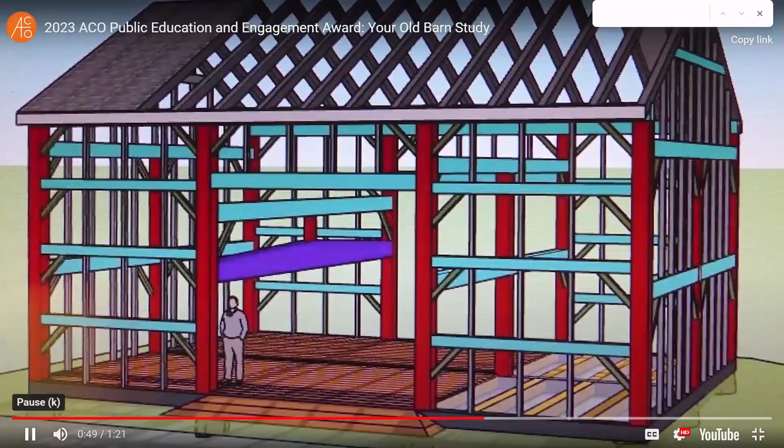Your Old Barn Study is the 2023 recipient of the ACO Public Education and Engagement Award. Founded in 2019, the non-profit Ontario Barn Preservation (OBP) is the only provincial organisation committed solely to the leadership of saving old barns. Partnering with the University of Guelph's History Department, over two years OBP directors and six experiential course students created the Your Old Barn Study software, designed to capture valuable data on the construction and significant features of old barns, as well as wonderful old barn stories. The project's innovative idea is to train a small army of owners to document their own barns using simple educational tools, smartphones, and computers, to collect and send searchable information to a central database. Ontario Barn Preservation believes Your Old Barn Study may result in one of its most significant methods of saving old barns. Although only dozens have thus far been studied, the ball is now rolling.

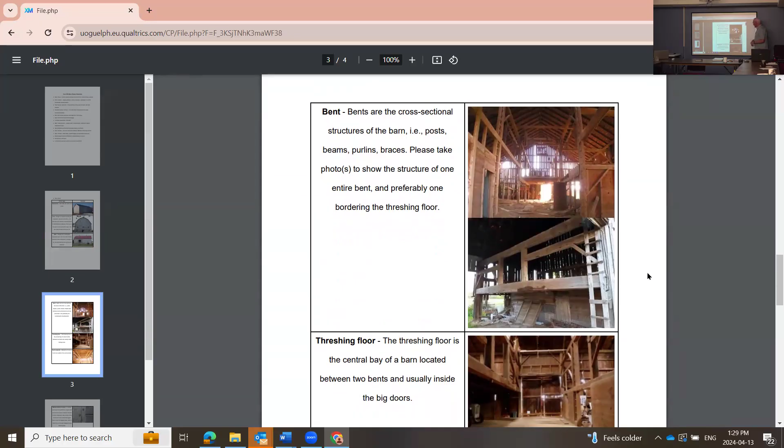We'll talk to you about why you should do those and how to do them. We're going to be asking you to take some pictures of the bents, which are the framing members that hold up the barn. We're going to ask for a picture of the threshing floor, which is the big floor area usually at the front of the big barn doors. And we're going to ask you to take a picture of the roof.

You may say, well, that's a strange thing to take - the roof, why would I do that? Well, it tells you an awful lot of information. To the trained eye, you can tell an awful lot.

When I get people who call me about swing beam barns, they'll say, I have a beautiful swing beam barn. I say, here's 3 pictures I'd like you to take for me. And I can tell them just about everything I need to know about their barn without even going out of my house, and I can see things. I had a fellow last week who called me from Ohio to buy my book.

And he says, I have a swing beam barn. I said, really? Can you take a couple pictures? Anyway, he took a couple pictures, and there were some things in that barn that I see in barns here in Ontario he'd never seen before in his own barn - never, including his father, who's older than me. You can tell things about it - I said that ages the barn, that helps tell how old that barn is. So you can learn an awful lot from these.

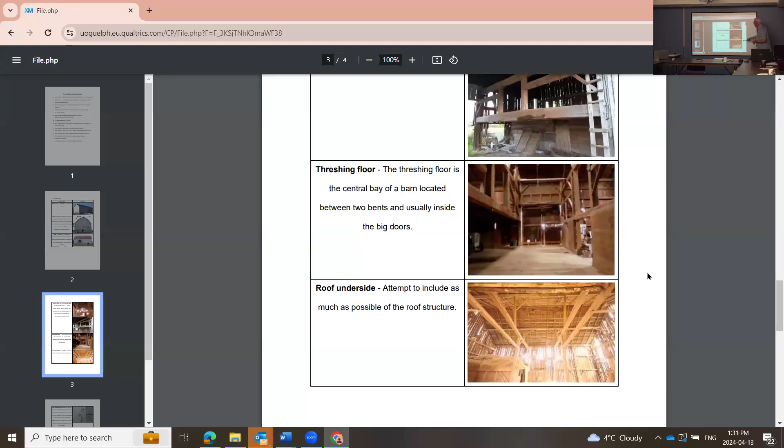We're going to ask you to take pictures of a mortise and tenon joint. You can also tell an awful lot about the age of a barn from the size of the pins and even the way these things are oriented.

That's probably the last one, okay? And then if you're really not comfortable doing a digital version, you can also download a paper copy of this thing and go through the barn and check things off yourself, then put it into the software later. Just try hitting that download and you'll get this little document - it's everything that's on the website, exactly in here, just in condensed form. That's a way that you can do it. It's 72 pages long if you print it out, and so that's why I did it.

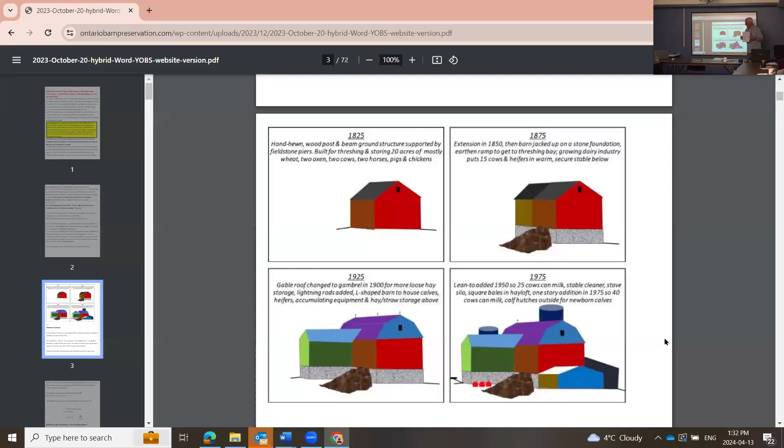I actually put this together - I did it so that I could print 4 pages on a page, front and back. So it's only 18 pages long, a little less trees lost doing that.

Okay, so we're going to go right into the beginning and go back to the actual study itself. There's just question after question, and you just go through - you can start anywhere, you can end anywhere, you can come back to it anytime you want and start again. The software is smart enough that it knows it came from your laptop or your cell phone - you can do it on your cell phone too. It'll go back to the same place where you left off.

The only thing you have to be careful of is when you get to the end, there's a submit button, and as soon as you hit submit, it's gone - you can't make any more changes, and it's in the database. So we end up getting lots of false sort of records because people hit the submit button and didn't realize they weren't done.

So we're not going to do that today, though, Emily, are we? But we are going to hit the submit button - finish it. We are going to finish one here today.

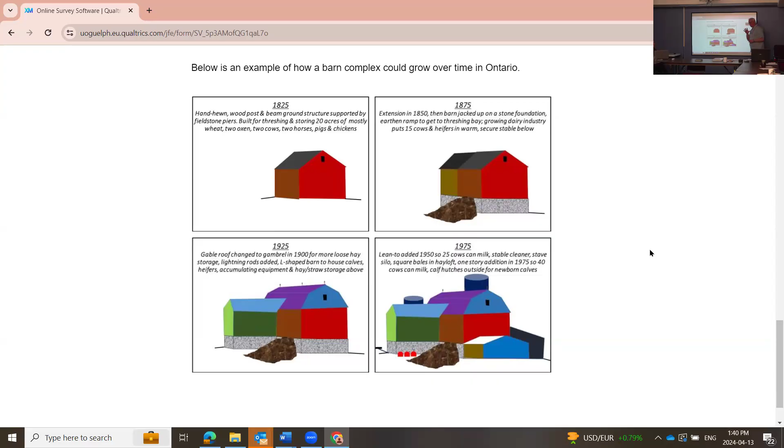Can I? Okay, just, yeah. I'm gonna have the gambrel.

It's actually French. So the oldest gambrel roof, or thought to be the oldest gambrel roof in North America, is at Harvard Hall, Harvard University - from 1677. So there were old ones, yes. The influence of the gambrel roof is even seen in housing, it's the attic space too, to make it livable, and typically it's more staff or servants that live up inside an attic.

So even though it might be a newer roof type up here in Canada, it's been around for 350, 400 years - in barns too. So I wasn't aware of that, that's good. I put on my professor hat sometimes. That's good, there you go.

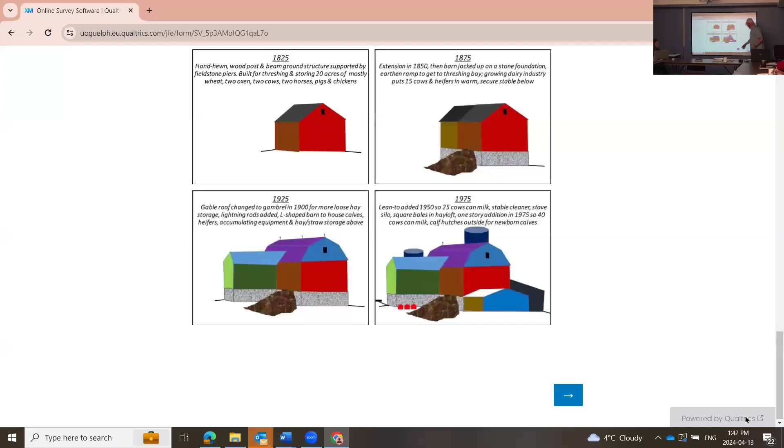Yeah, so there's a little arrow here. You hit the little arrow and it takes you to the next question. And then there's an informed consent - basically this says we need your permission to do this. So your completion and submission of this study is your consent to participate. That's really how this all happens, with all the legal stuff and everything else.

And then we have a little button, you gotta show that you're not a robot. You've probably seen that on things. There's always some kid somewhere trying to scam things. I'm always amazed how many people find time to scam stuff. It just drives me crazy - I think that's the scum of the earth.

But anyway, so you put in your names, and this is going to end up in a great big humongous spreadsheet at some point. You can't even imagine how hard it is to actually massage it all. So you put in your phone number, and you've got to put in the dashes here.

Again, these are all optional - if you don't want to put your email in, that's fine. But the email is there in case at some point a student or somebody connected to this may have to go in and clarify some things - you did this, we don't understand - and that's how they can contact you. The street name and number, again, is just so we can geolocate you.

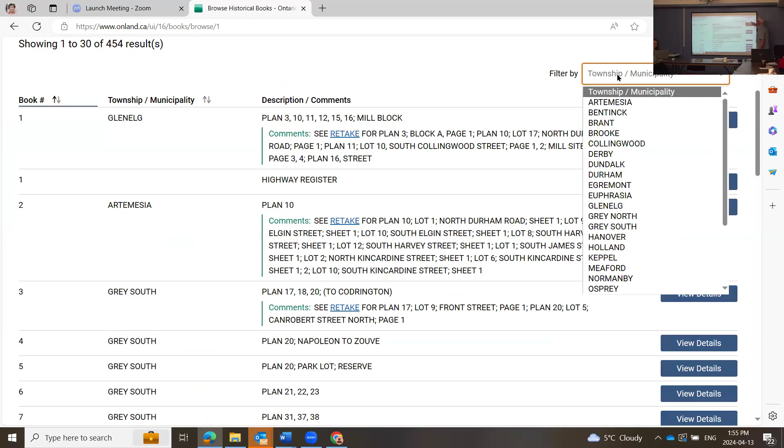And then you go to properties, historical books, browse books. Yes, go to this, sometimes it's a little hard to get to. Then you go to township and municipality, which should be Collingwood, and then you go to concession 9, which I think it was. Then you open up the book, and I forget what page it was, oh, just go to page 100.

What lot was it? 20. You see, I can't even see which... you can zoom, you can make it bigger. That's lot 19. Okay, so just go to the next until you get to 20.

Oh, you're already there. Are all of the books digitized now? Pretty much, yeah. So go to previous... No, previous again, we're still in the 1900s. Go to previous again.

This will be it right here. So I had a heck of a time reading this, but I think, and this is the thing you get because it's all handwritten. You can probably make that bigger, but I think it was around 18... it was good, looks like 1860 something, 68. It does look like 1868, which surprised me. I thought it would have been earlier than that, but 1868.

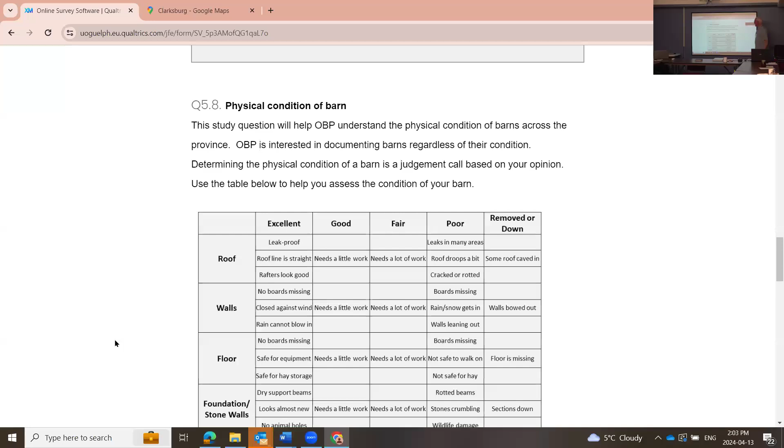Then we ask you about the physical condition of the barn, and this is a qualitative analysis. We're not asking you to do a big detailed structural analysis, but in your opinion, is the barn roof in excellent condition? Is it leak proof? Is the roof line straight? Are the rafters looking pretty good, or are they all broken up? So down below, we do the same thing with each of the main components: roof, walls, floor, foundation, and structural members. We just ask you your opinion.

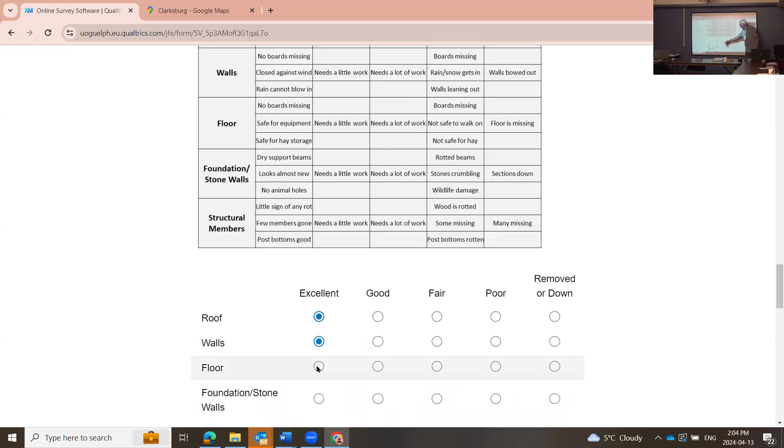If they look like they're new, they're excellent. If they look like they're in very good shape, they're probably excellent, but maybe they're good. It just gives us a sense of what shape that barn is in. The last category is actually it's gone or it's fallen in. It's unlikely that you're going to have an excellent roof and walls that are down, right? Those won't go together probably.

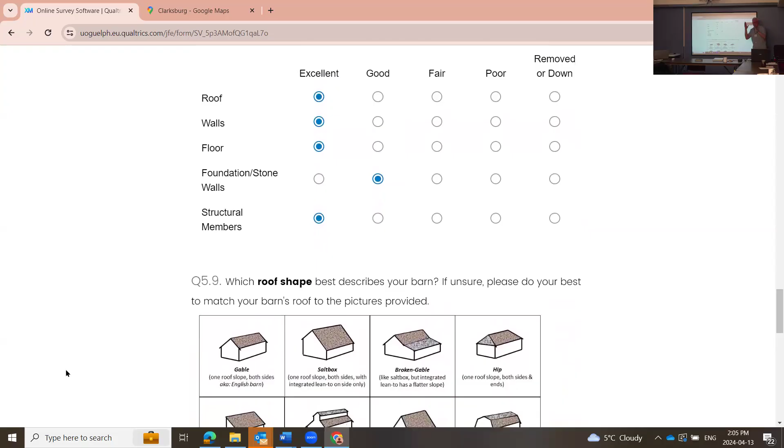So that's kind of the way Emily, her brother, and I assessed her barn. I would say it's in pretty good shape. The walls had a little bit of a teeter to it, but they put some buttresses in there, and it's not going anywhere.

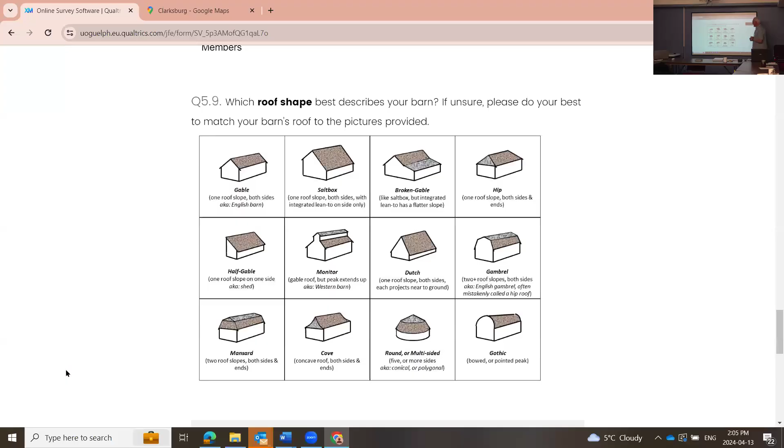Then we ask you which roof shape best describes your barn. We've got several different roof shapes - there's more out there than this, but the common ones are gable and gambrel. Those are the two main ones. I've seen some of these monitor types in Grey County. Some of these other ones are Gothic, round or multi-sided, cove, mansard.

We actually have a mansard barn down in Niagara, and people are always asking what the heck is going on with that barn. It's just the strangest looking thing, and it is a strange looking barn. Built in 1885. There's lots of half gables out there.

The Dutch barns are very, very old. There's only a couple of examples that I'm aware of in Ontario, but there's a bunch of these in New York State. This is actually an actual gambrel barn, which a lot of people call a hip barn - I did when I was a kid - but truly it is a gambrel shape.

Okay, so which one was yours? Gable, yeah, gable. And so depending on how you answer that question, it'll eliminate some questions to follow, or it'll leave those questions in there.

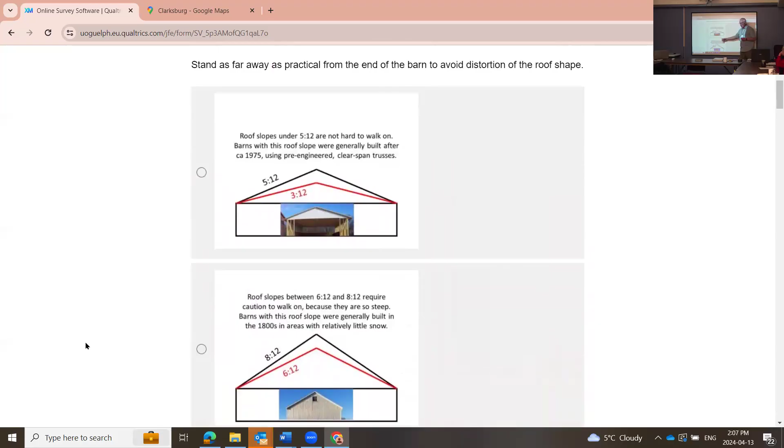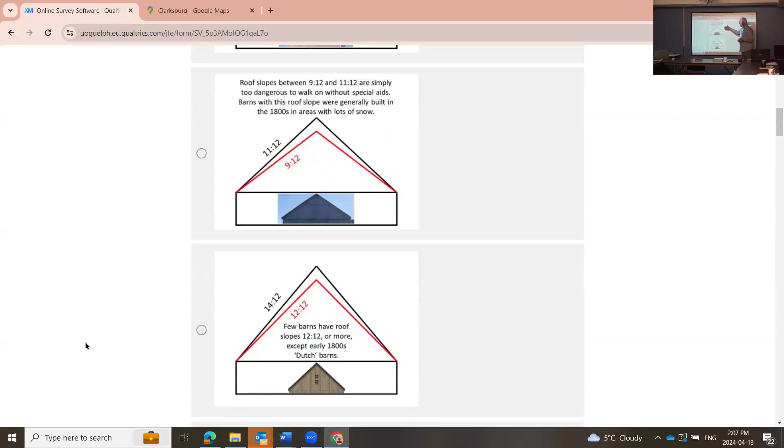So then it's going to ask you, what shape is that roof? Is it a pretty flat roof, 3-12 to 5-12? Is it getting a little steeper, 6 to 8? Is it 9 to 11? Or is it really steep, like a Dutch roof that's 12 to 14 to 12? I don't think I've only ever seen one roof like that. Most of the barns fit in these two categories here - the flatter the slope, the younger the barn will be.

This, I mean, is more typical today. In fact, we actually see 2-12 barns and 1-12 barns, and flat roof barns out there now in the livestock industry, just because they're steel frame or whatever.

How do you figure that out? That's a good question, I'll ask Steve or our friend back here. I don't have a little device that measures that, but one of the things I'll use is the end view of the barn. I take the end view of the barn, overlay a photo on top, and say yeah, it's 6-12, close enough. So I measure the wall, and that's how you can figure it out.

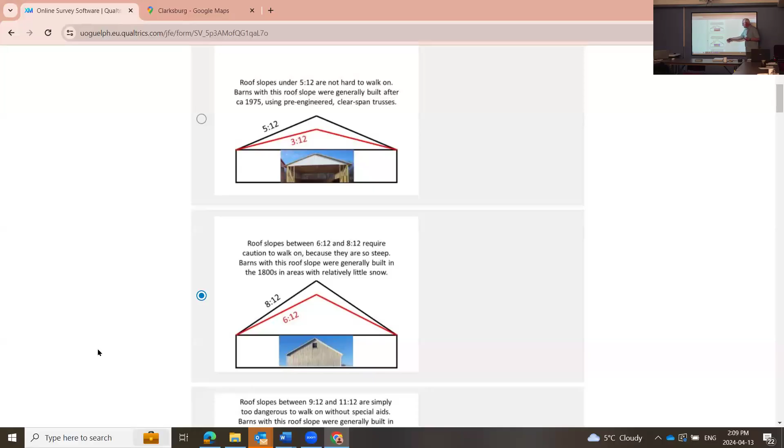So what did we decide that yours was? It's kind of in between this one and the next one. I think we said it was 8-12 or thereabouts.

And it's a swing beam barn, actually. You know that one? That would be a good one to get in. Is that off Highway 6? Yeah, maybe a half a kilometer, or maybe 300 meters west of Highway 6. There's big fish ponds around it.

Yeah, I don't think it's used for anything right now. There's a big silo out back - I don't even know if that's still there or not. Anyway, it's a swing beam barn, and there's not many of these stone barns left.

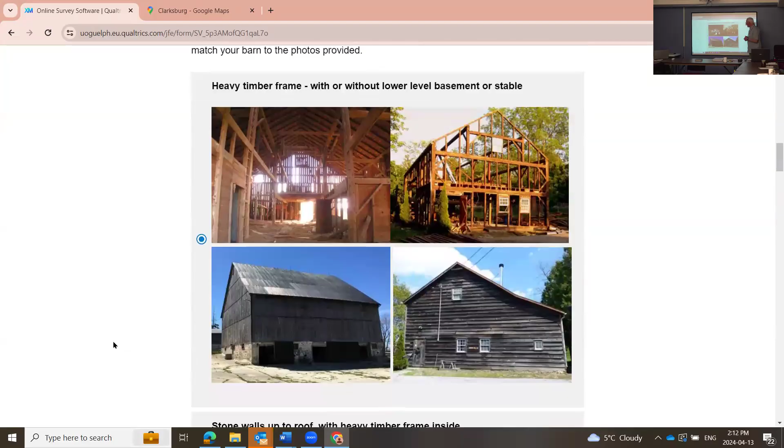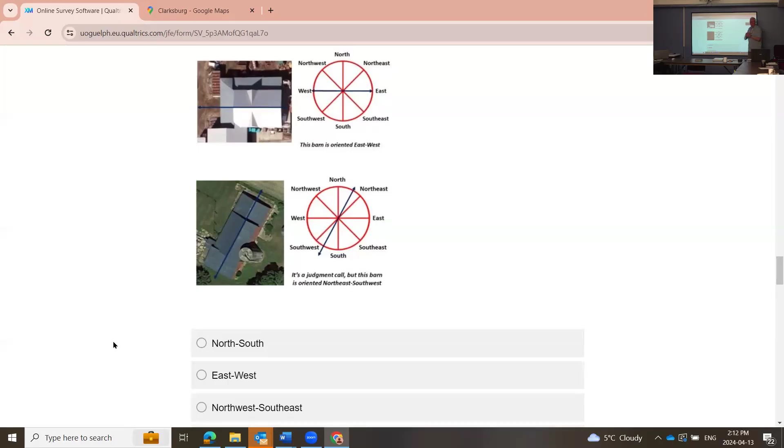Okay, compass orientation - is it east, west, north, south, northeast, southwest, whatever, what's the best guess on it? Quite often they would have cattle areas on the south side that were out of the wind and a little bit warmer in the wintertime, but maybe that changed regionally. This is something we will analyze in the future - say, okay, in this area people built barns in this orientation or that orientation, or maybe it was just simply because it lined up with the road.

Well, we don't know. So what did we say yours was? East, west.

So, barn measurements. This sometimes stumps people on how to do this, but we're not trying to get perfection here. We want to get the width of the barn, outside width, outside length, and the height of the wall up to the roof plate.

So these are the dimensions we're looking for. This is the barn, the schematic that my friend drew on SketchUp, a very simple sketching program. This is the one where he put a picture of me inside the basement.

My son-in-law took that SketchUp file and went to the Owen Sound Library. They have a 3D printer there, still there or not, but he actually built me a 3D version of that barn with a 3D printer. I've got it at home. I should have brought it. It's absolutely identical to that.

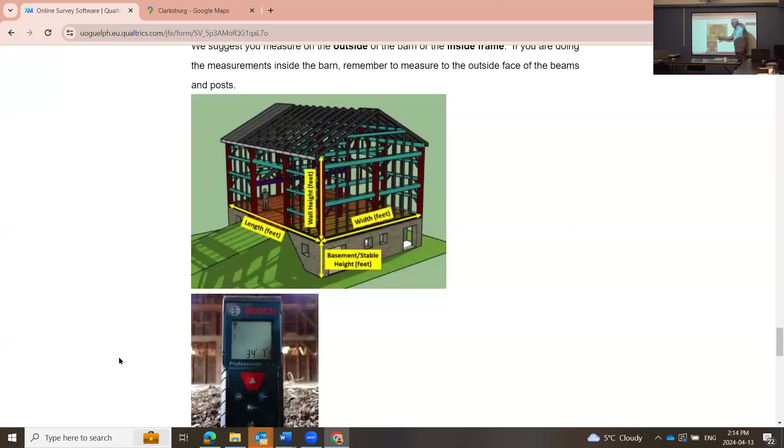So we're looking for the length outside and the width outside, and the height from the floor up to the top of the plate, and from the floor down to the ground as best you can. It's not always easy to get some of these dimensions, but what did we come up with?

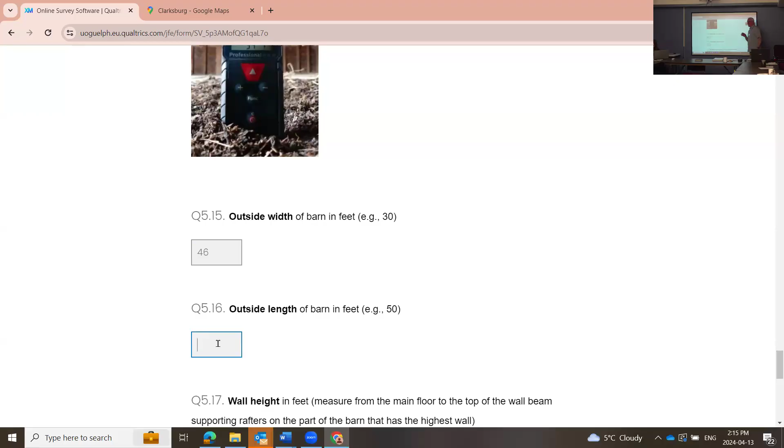So there's a couple of barns at Emily's place. We only chose one barn and it was 46. So you don't have to put the foot thing on it, but I actually don't know what happens if you do that. I'm gonna find out because somebody has definitely done it. We have about 100 barns in this now.

It's taking a while to get people onto it. Steve's done a number of barns. He's just gone out to a few people he knows, got their permission to do it. He's getting really good at it now.

It's like everything else. The first one takes 10 hours, the next one takes 8, and then he'll be doing them in half an hour. That's just the way it is.

So we had 17 and a half for the wall height, but it won't let me put in the decimal. Do you want 17 or 18? What's the feeling of the crowd? 17 or 18? 18. Let's go to 18.

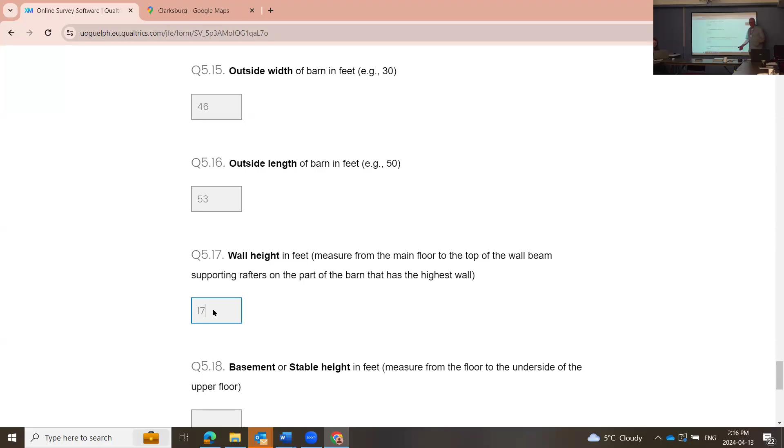And that's actually significant, to put the height of the wall in, because that's to the top of that beam where the rafters sit on top. Okay, the top of that—let's say this is the beam, the top of that.

So when the fellow from Ohio sent me pictures of his swing beam barn, the first thing I noticed is how short the walls were. I said, those look like they're 12-foot walls. He says, yeah, they're exactly 12 feet. How did you know that? I said, well, just the way everything looked.

We don't see 12-foot walls in swing beam barns here, at least I haven't seen. That's a unique regional thing that they would have there. We don't have that here. Our tree supply at that time, because they would have been harvesting early. Yeah, but possibly it might have had something to do with available labor, who knows.

But our barn—the highest one I've seen here is over 20 feet. That's pretty high. The other thing is their winter storage requirements wouldn't be as much. That could be too, that's a good response, quite possible. Yeah, that could well be one of the reasons. There may be other reasons.

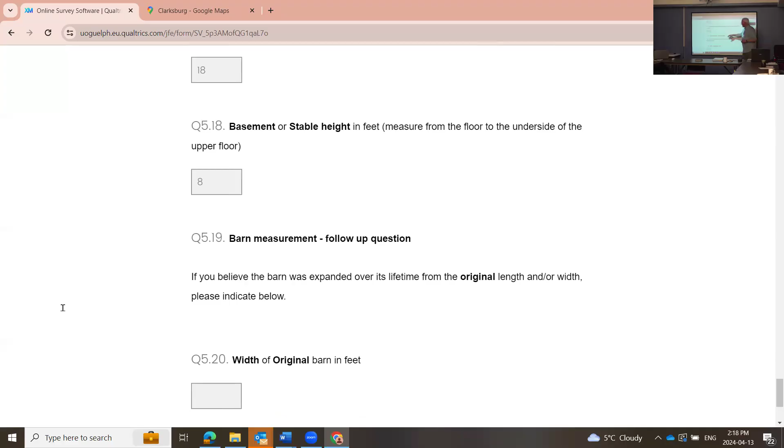So that's good, and then we said 8 feet for the lower floor. There's a lot of them that are even lower than that, and when you start hitting your head on beams and stuff, that's when you wish you were a little shorter.

We ask if you think the barn had been extended. You quite often look at that beam up there and see that they actually put an extension on, and the rafters are different at that end—it was a whole new addition. So we ask, what was the original width? They widened the barn, they lengthened the barn. We just ask a simple question about it.

But it doesn't cover cases like ours, where the barn was lifted up and a basement was put underneath about 30 years after the barn was built. You're right, and that's something we don't actually have a question on. I don't believe we do.

But you could add that in the comments at the end. Because that actually happened a lot—they jacked a lot of barns up. I'd say 50% of the swing beam barns I've been in were jacked up later. They were just jacked up and a stone foundation was put in.

We jacked ours up so we could get in with the tractor and load it, so we didn't have to clean it by hand. Yeah, that's a good reason too.

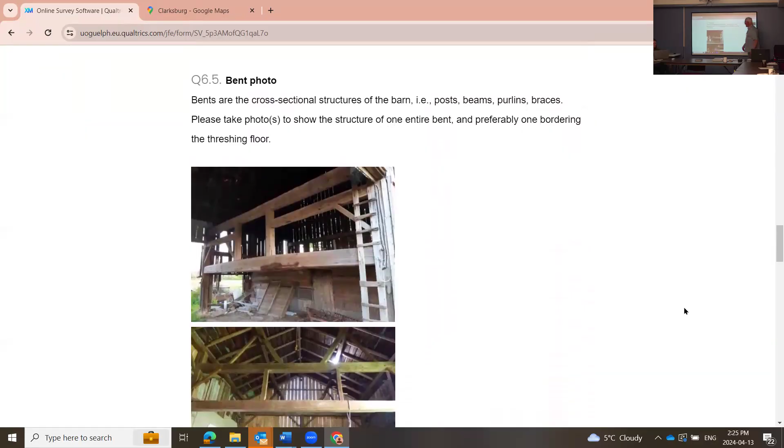Good, and then a bent photo - the bent is the framing, one of the framing members for holding up the barn. This is quite clear, it's an old barn, you can see it's right on Highway 3 near Dunnville. So you get lots of light in there, that's the framing one.

Here's another one. This barn is actually in Grey County, near that ski area. Grey Road 7 runs north-south. There's a valley, Beaver Valley - yes, it's in the Beaver Valley. Double swing beam barn, beautiful, one of the most beautiful barns I've ever been in. The end posts are actually flared, narrower at the bottom, then they go up wider, then narrower again. Just, it was done by an artist. Beautiful barn.

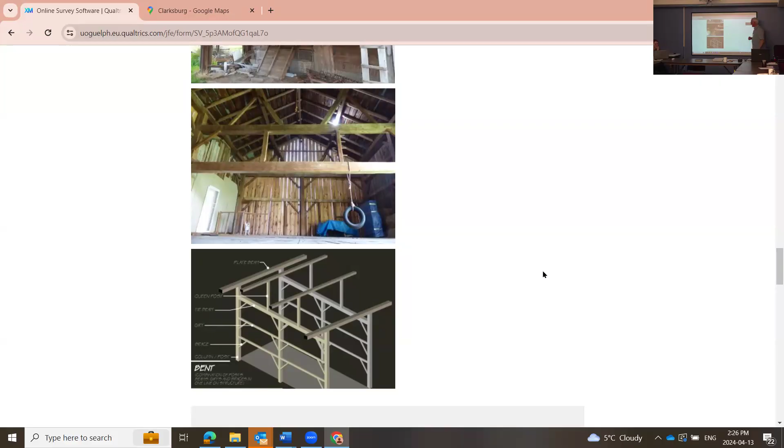So we took a picture of a bent. Sometimes it's hard to take these pictures, you can't stand back far enough. But really what we're looking for - can you just open that picture up? We're just looking to see how the barn is put together. So some of the key things, we want to see some of the posts, the angle braces, tie beams, maybe how it's connected to another section out to the side. But you can't hardly stand back far enough to do that, but that's a pretty good photo to give a sense of what's going on in the barn.

The greenery in the back. Sorry. Yeah, that's fine.

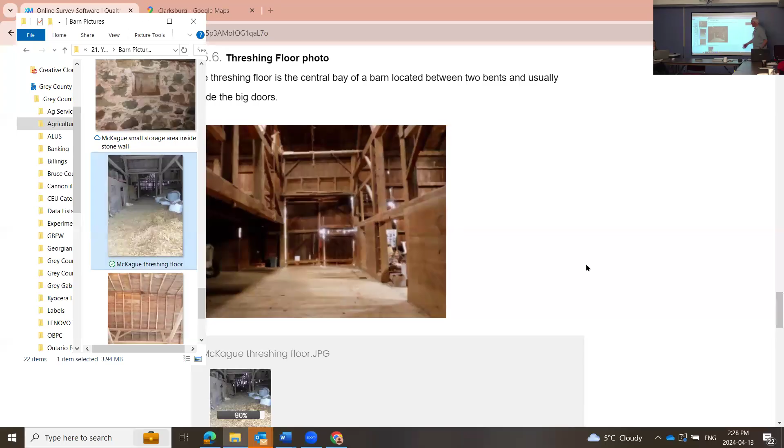Then the threshing floor, inside the big doors, you want to have a photo of just what things look like on that threshing floor. When I do photographs I usually do a series with flash, without flash, and then just put the best. This would have been with a flash, and maybe in hindsight I should have taken - well, I didn't actually do the photo for the barn study, but so there's the threshing floor. Maybe not the best photo either, it was getting kind of dark when I got there.

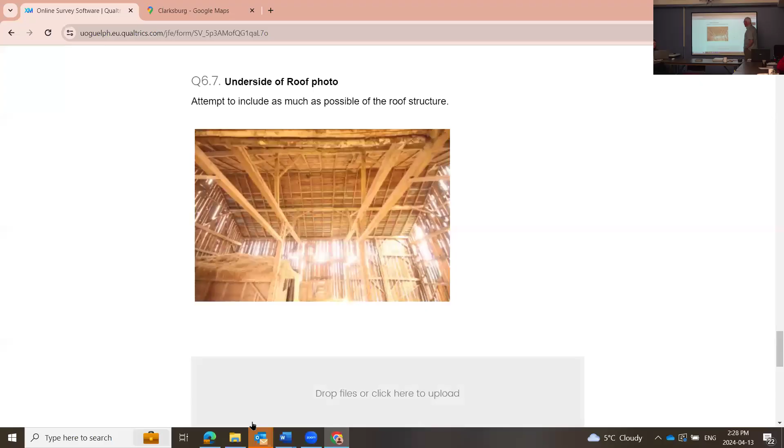And then a good picture of the roof, underside of the roof, shows a lot of things. Shows rafter spacing, and it will help you understand if things are missing. It shows the full length of the barn. Yeah, lots of different things. So that's a good photo.

And that's the one we took in that barn. So this shows a bunch of things. It shows the track up here - here's the track they would have had, loose hay on a hay fork running along there. It shows that there's round rafters here, you can see some of them have little wanes in them but that's okay. I think these all - round or not, can't recall. They look like they're square timbers, can't remember. It looks square, yeah, and there may have been some that replaced, yeah. You can see the width of the cladding up here, and you can see how they all line up with this, then they all of a sudden start again instead of staggering them. It just tells you a number of different things. It'll probably show you some members that are missing - we don't see anything missing here. Yeah, it's a good photo.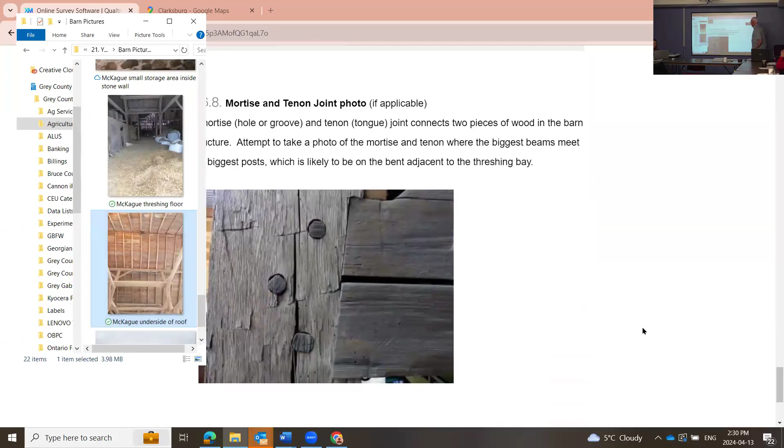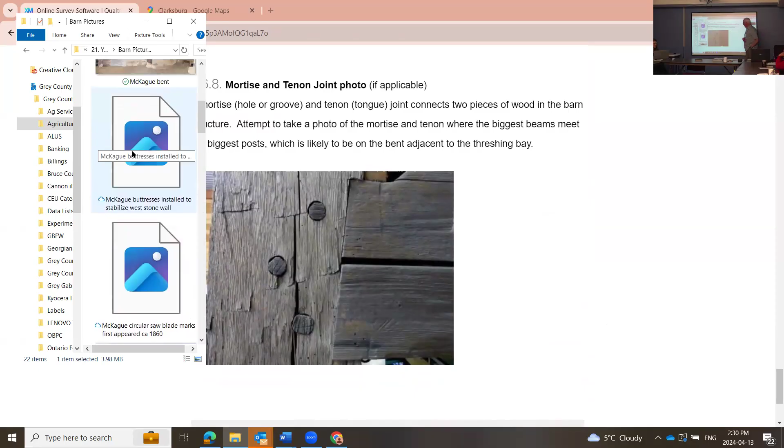And then we ask you to take a photo of the mortise and tenon joint. Generally speaking, the biggest beams will be on either side of the threshing floor, although not necessarily, but that's often the easiest place you can take a photo. This particular mortise and tenon is not square, it's actually angled - you can see it's got an angle to it, shoulder here. These pins in here, I think, are 1.25 inch diameter. Bigger the diameter, probably the older the barn. Biggest ones I ever see are 2 inches, which is a big pin. You'll see those in barns way back into the 1820s.

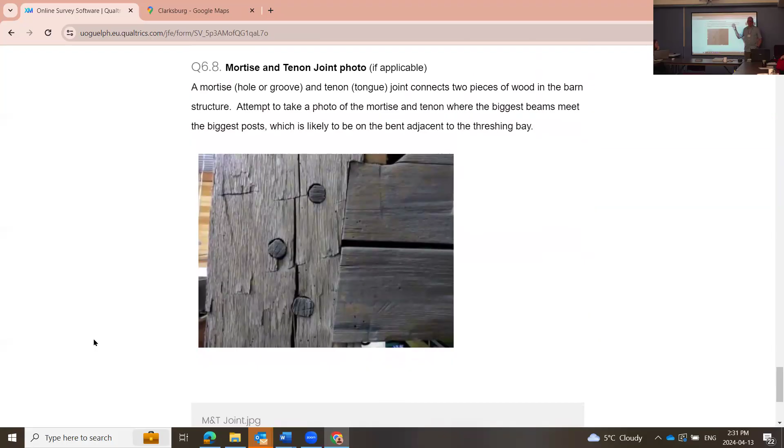Yeah, so that's a good photo. In this survey, do you ask for that kind of information too? There's a spot later on for pins, but there's spots for comments all over the place too. So if you think there's something unique to your barn, just tell us. It'll end up in the database and we'll worry about it later where it actually goes.

That particular question, how big are the pins, I don't think is in there. I do, I think it is. Is it? Okay, maybe it is. We measured them anyways. Yes, yes.

Okay, so then there's a section on special features. The first part starts on the roof. So what do you see up on your roof? There's a whole bunch of examples.

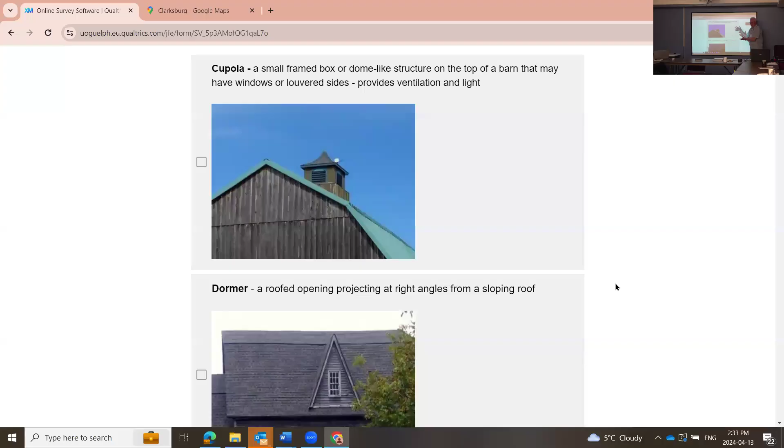Funny story, I got a call from the insurance company because it's actually in my book, and I'm the only one who actually knew what the barn looked like inside. So they're trying to recreate the barn to figure out the insurance claim. That puts a lot of pressure on me. I didn't really expect that to happen, but it's in there with a lot of photos. So again, this is almost like a little insurance thing for you. You record a lot of stuff in here. It might come in handy someday. Just saying, it might come in handy.

Do you have a dormer sticking out the side? That's actually what this thing is right here. So that's a dormer, probably added later. This roof was actually changed too. It used to be a gable roof and got changed to a gambrel roof, probably 100 years ago. That barn was built in the 1840s. Are those features common? No, well, they're not uncommon, but you don't see a lot of them.

A hay hood, or a turkey tail, or a hay bonnet - I guess they got all kinds of names. Where I'm from, we don't see a lot of these, but some areas you do. For rain, they'd be picking hay up from outside and taking it down. There's different sizes of these things. This is a real extreme one, but you have it. And you can check as many of these as you want.

Lightning rods - lots of lightning rods on old barns. They only started going in around 1880, something like that. It doesn't necessarily mean the barn was built in 1880. This one was built in the 1830s, and they added it later.

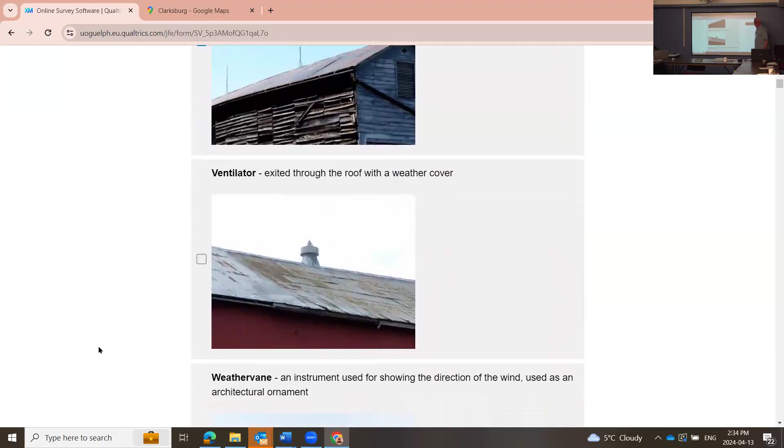Ventilators out through the roof. Lots of barns have those.

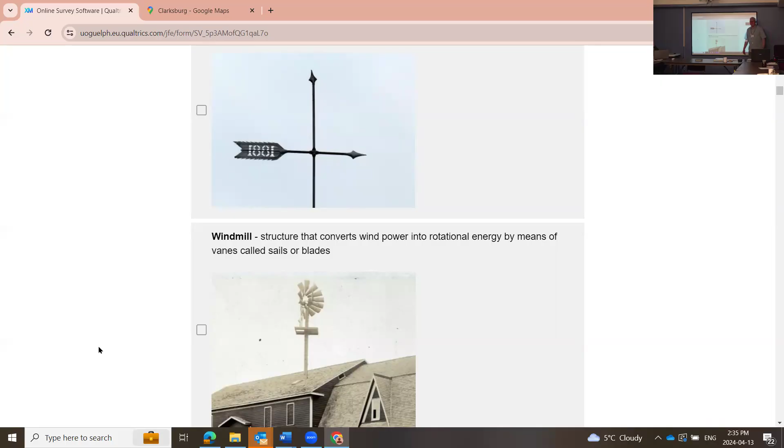Weather vanes - this one says 1881, but that barn was built in about 1850. So it doesn't necessarily mean that's how old the barn is. I had a fellow one time tell me, I said, I think your barn was built about 1850. He says, oh no, not a chance, it says on the wall 1910 - I can show it to you, 1910 on the concrete. I said, yeah, the concrete thing was put in later. No, there's no way it was 1910. But anyway, can't always convince people.

Windmills - so that could be there for pumping water, or it could be there for grinding grains. There's another dormer right there. That barn is still there as well.

It's a picture, and then the wooden shakes or shingles. All these barns built in the early 1800s definitely would have had wood shingles, and quite often, even after barns have been added onto later, you can still find the old shingles up there. There's some really good examples where they've been preserved and covered from the elements for 100 years, so they're still in pretty good shape. They're dirty and covered with pigeon shit and everything else, but they're still in pretty good shape.

We're doing this today. Or where did we put in the little half doors? You know what, we'll do it on the walls. So on the outside of the barn walls.

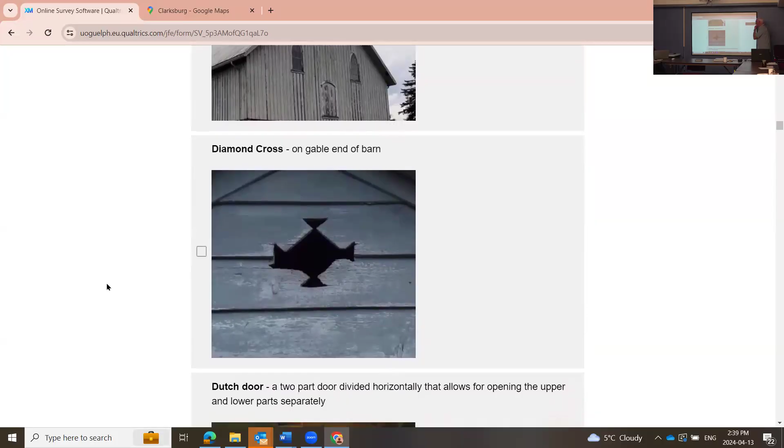Does it have diamond crosses on the gable end of the barn? I saw some examples of this in your book. We see these in our area, all the way back from the early 1800s right into the 1900s. I believe they are part religious and part good luck charms. They seem to correspond in our area with the influx of the Pennsylvania Germans. Yes, and that's where you do see it.

I believe they were an early form of insurance. So basically you said to God, please don't burn my barn down. But it was also to stop fire, I think. This is the same cross you see on firemen's... I don't even know what it's called, but anyway, that's their logo. So I believe these things were there to say, please God, don't burn my barn down, and it was a good luck charm. Also, if you didn't put it in and your barn burned down, well, you were a damn fool for not putting it on. But if you did put it on and it kept staying there, well, that was a good idea because I put it on and the darn thing didn't burn down. So I think there was a lot of peer pressure to put those things in.

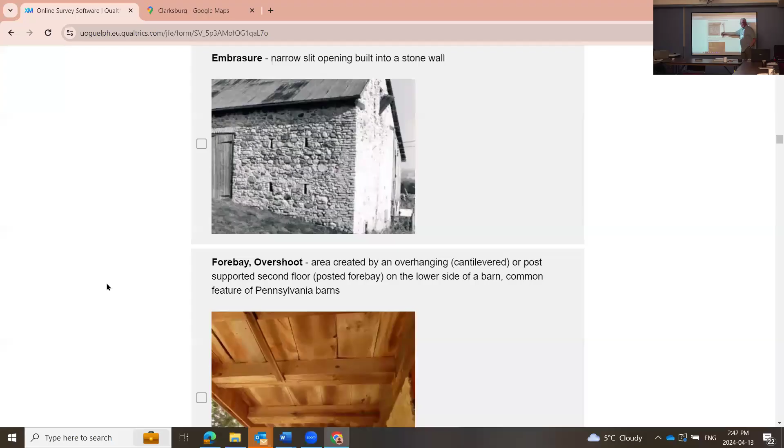Embrasures, this is actually the barn here in Durham, you see these little holes? People think they're for sticking your gun out to shoot at people, but they're more for ventilation or anything else. Pretty rare to find those. Although they are in one of Farmer Tim's barns, he has those.

So just for the rock. Yes, and there's also one on Campbellville Road. Yes, that one, that's beautiful, I want to get in there. I know, I'd love to get in there. I really would love to write a book about stone barns. I don't know, never been.

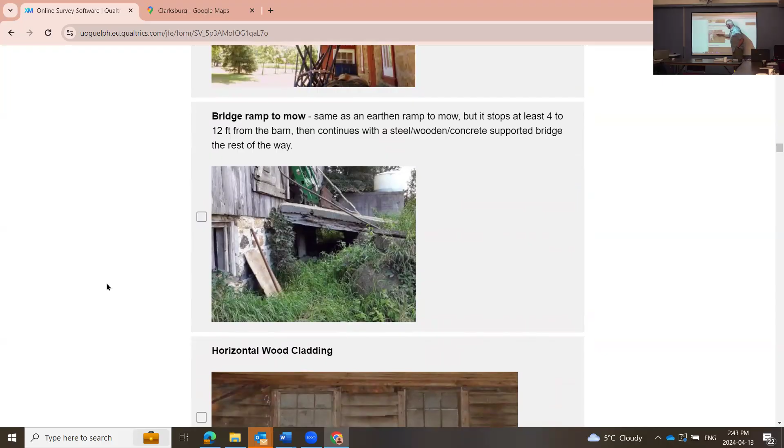A forebay or overshoot, where it overhangs, that was kind of a Pennsylvania German sort of design. See a lot of those. A bridge ramp to the mow, so where it's open underneath, but there's some kind of wood or steel ramp that goes up into the mow. Horizontal wood cladding, that's a real sign of old age.

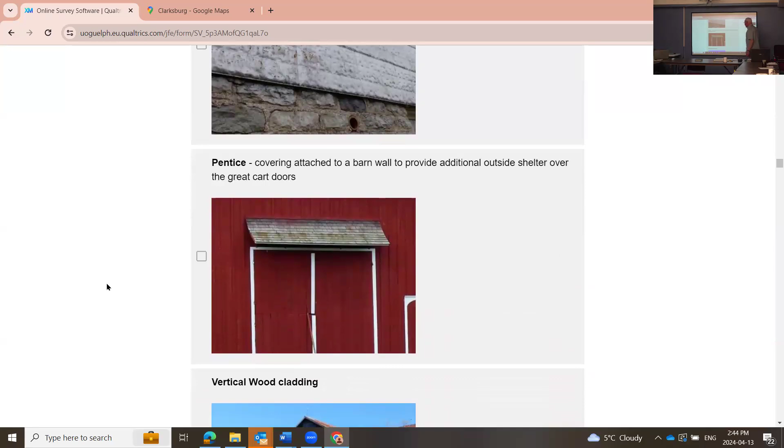And then a pentice, something that looks like a little roof that's over top of the big door. There's one at Emily's farm, and the vertical wood cladding. So you'll see that on a lot of barns. So she's checking that. So what was the difference in horizontal and the vertical cladding?

Well, the horizontal is a lot older, would have been a lot older than this. But I think this probably was a lot easier to do at some point. I don't know if anybody's got some thoughts on that, Steve, but see how they're overlapped here to shed the rain? Same with the horizontal ones, they shed the rain. You got frame inside, and they're framing different inside, you're right. So you need horizontal beams here to attach these things to. Whereas on the other ones, you could have some different features inside to attach to.

This is actually in Markham. Right in Markham.

So why don't we put something in under other? So why don't you, oh, did you check off this? Yeah, no, check that one off. Call it that, yeah. And what do we want to put here? This is where your A doors are. Why don't you put down small decorative A doors? We'll put a picture of them on gable end. They both, yeah, ends? I think it's on all of the sides. All sides, okay. Well, not that you do anymore? Okay, yeah. Yep, okay.

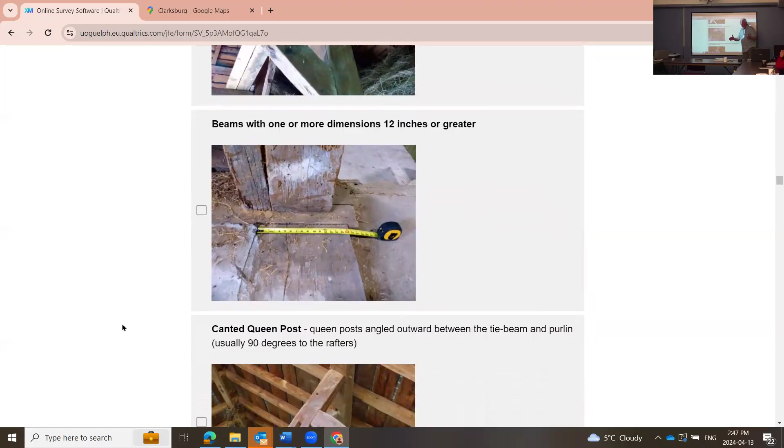Beams with one or more dimensions of 12 inches or greater. This is a beam that's 16 inches wide in a floor in a barn in Dunnville. It runs the entire length of the barn, and that takes a big tree to do that.

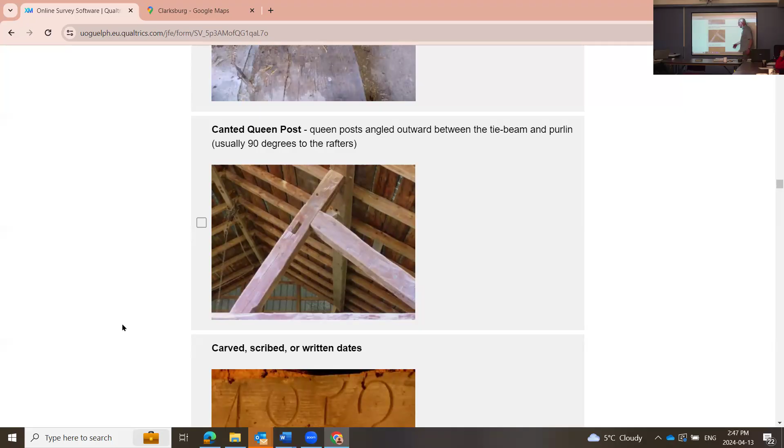So, canted queen posts - posts that are on usually a 90-degree angle up to the roof with a brace. Doesn't have any of those. They came in mostly around 1840 or so in Ontario.

If you've got some dates that are on there, this one is one of the best examples I've ever seen of a carved date. It's just beautiful workmanship. Somebody really knew what they were doing. That was not easy to do. It's just beautiful. And the farmer who owned this thing just happened to find it on a board in his granary. It was just an accident. Found it.

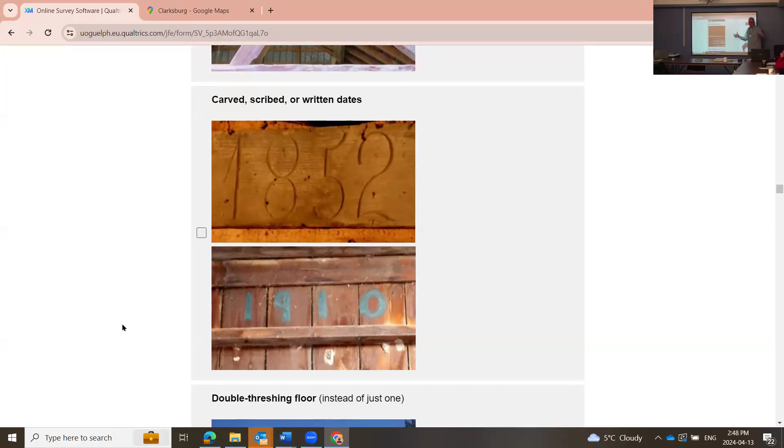Double threshing floor instead of just one. You see those in Wellington County and places up here. We don't see them down in Niagara at all. Why would they have been up here and not down there? Probably because they were built later up here. And by the time these were being built down in Niagara, it was starting to get into fruit stuff instead of wheat.

And the farms were a lot smaller down in Niagara than they are up here. We have the smallest farms in Ontario, lot wise. We have the oldest network of roads in Niagara, so they're so close together. Up here, the roads are a long ways apart. Down there, they're very, very close together. Farms are on the average - to find a 100-acre farm in one parcel, there might be 5 in all of Niagara, like north of the escarpment. They just don't exist.

This was an interesting one called a fire letter. I'm told that this letter is actually sitting in the Markham Museum.

It's all in Old German, written in Old German, but basically it says, 'God, don't burn my barn down.' A fellow I interviewed said he found one of these in a neighbor's barn when he was a kid. I think that might be it because he donated it to the museum. It was tucked away up on the roof plate beam under a rock, just hidden. Probably the owner who built this barn was the only one who ever saw it. Who knows? Basically it was a letter: don't burn my barn down, please go next door and burn their barn down, don't burn mine. So anyway, you don't have that.

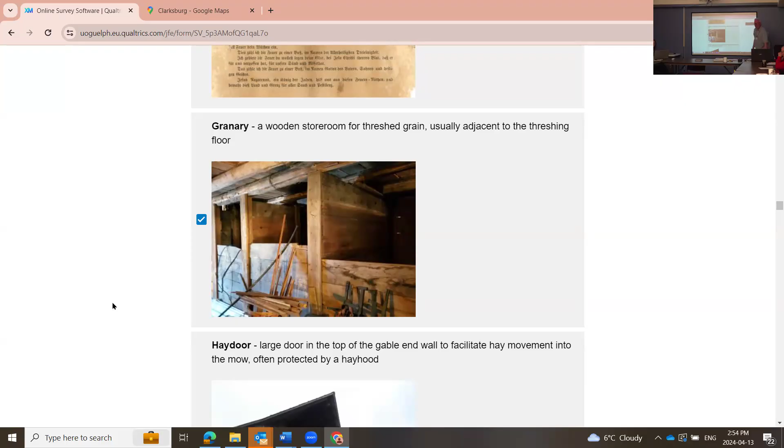And I was wondering, what is the purlin plate that people used to talk about when they built barns? Well, you recently showed a picture of what we call a cat post. Yeah, can you scroll down? That would go to support a beam halfway up the roof, that's the purlin post. Yeah, sometimes you'll hear it pronounced 'purloin,' I've heard that as well, but it's purlin. I just knew it by oral sound, it sounded like 'per line.' Yeah, and I've heard 'purline' as well.

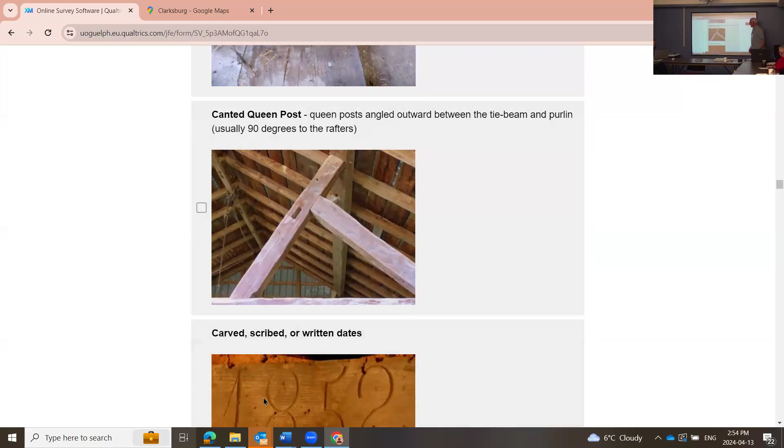Again, a hay door here. That's what we were talking about with your hay door, but I don't think they flipped down, did they? I'm actually not even sure, I don't really know how. Were there hinges? I don't know how they opened those. No, this is my mom's, oh okay, there you go, no family resemblance, I'm not sure. I think they probably swung out, probably got hinges, maybe they don't have anything now. They might actually lift out behind there, I think some of them might have worked across behind it.

Okay, a hay fork and a trolley - again, it's definitely in that barn. Before you go, another way to tell an old barn is if the rafters are hewn or not. You don't see that very often, but if they're hewn, it's a very old barn.

Down in Niagara, we actually see tapered rafters, narrower at the top than at the plate - wide at the bottom and narrower on the way up. There's probably a structural reason, but that was a lot of work. Why they did it, I'm not quite sure, but they'd be as much as 10 inches deep at the plate and maybe only 6 inches up top.

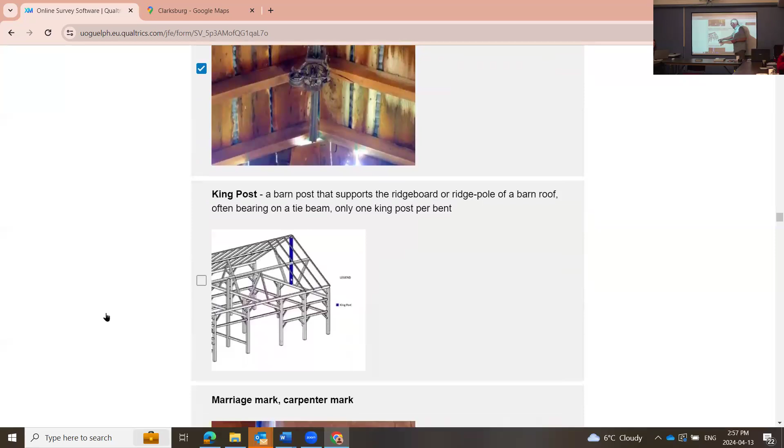King posts - I don't see these very often down in Niagara, but maybe they're more common up here. Not that common. Although there's a barn taken down in Markham that's going to be put back up at a place called the Brown Homestead - they have a website, really into old stuff. They're bringing a barn from Markham, putting it up on the site next year, and I believe it has king posts. It's a really old barn, I think it's like 1810. I think it was a swing beam barn, but the swing beam is gone - I think it was massive.

Marriage marks - I don't know if you see them up here, but we do see them down in Niagara. These are a message from the carpenter. This is bent number 3 - 1, 2, 3, see the little carve-outs here? They scribe it, then carve these marks, so this is number 3. This is actually on the swing beam, and that beam would go with a post that has an equal number of marks on it, so the people assembling the bent on the ground would know what goes with what, then they push the whole frame up. You don't see it very often, but it's a pretty good indicator of an old barn.

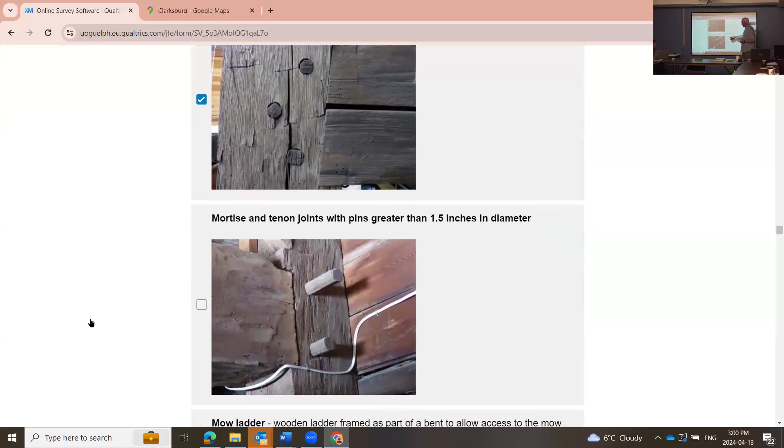This picture I took at a place - I don't know if you've ever come down to Niagara, on the QEW there's a huge operation called Shank Greenhouse. This is actually in their barn - they had no idea they had a whole barn. I'm trying to convince them to turn it into their office. It's full of junk, but it's a beautiful barn, with a 24-inch swing beam that's 14 inches wide, 30 feet long, tapered, with 2-inch pins in diameter. You'll notice they're also octagonal - that's how they did these pins, so when they drive them in, they really stay in. Just a beautiful, magnificent barn - needs some work, but it's magnificent.

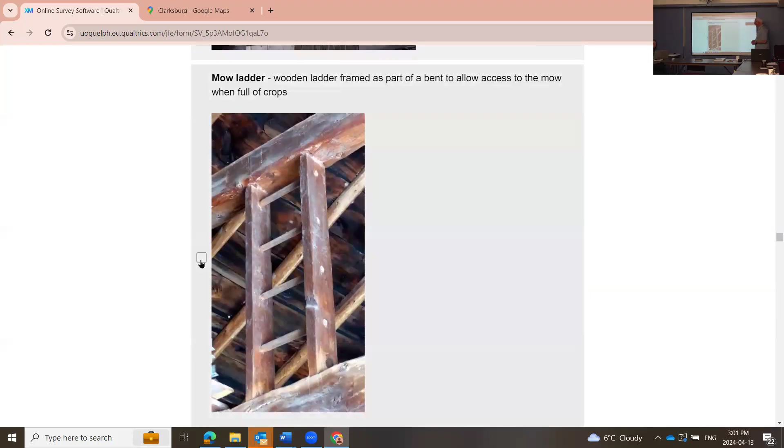Mow ladders - we see those in a lot of barns, quite often missing, but you have a couple at least. Mowstead walls - sometimes you see a wall beside the threshing floor.

You don't have scarf joints. And you actually do have scarf joints, but they're on the posts. I think the posts must have rotted at some point and they replaced them, so they have a scarf joint.

There's different ways these look together. Some of these are really elaborate how they've done it. They put pins. This one is actually not the best - this is in a barn down in Niagara.

Swing beam - you don't have a swing beam, but this is a very typical old 1825 to 1835 construction with the swing beam tapered, narrow at one end, narrow at the other end, braces, vertical strut, and a tie beam. The barn from Ohio only has the swing beam, nothing else, no tie beams, nothing, one swing beam. That's partly because the sidewall is only 12 feet, which is unheard of down our way.

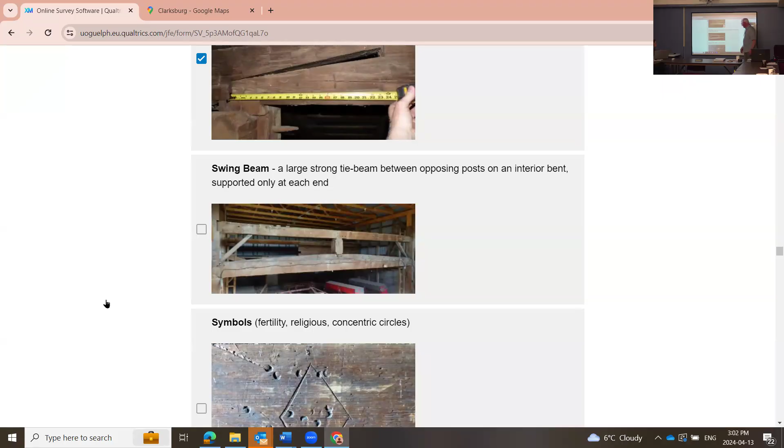Symbols, fertility symbols - this is a fertility symbol. You'll see those on beams quite often, often near the granary. Quite often they have a whole bunch of punch marks on them. They're for fertility of crops and animals, and I believe humans as well. There are also some religious ones.

They're concentric circles. Do I have a picture of that? I have a picture in my book of all these concentric circles, and you'll see those on really old barns. Sometimes they're hard to see - I've highlighted them in color so you can see them in the chapter on that.

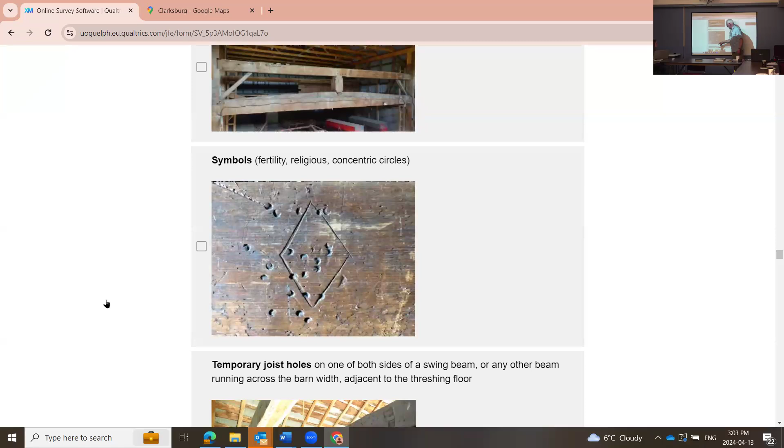That's actually in a barn down in Niagara. Temporary joist holes in the back of swing beams - we also see it on other beams as well.

Holes on the back side to put some temporary joists in, put more hay, loose hay or something up above there. No floor generally speaking, just open. Quite often they're quite close, as a foot apart.

I don't know, do you see those up here at all? You do up here? Yeah. So would that go like across to the wall behind it? Yes, so this is a swing beam, so it goes all the way from this wall, all the way over to this wall, no posts underneath. So the other side, interestingly, there's no holes in the beam on the other side. They go straight across and sit on top of the beam over there. So the swing beam is actually at a different level than that beam.

They go across, so it's like this - the joists go across and sit on top of this, not even into it, because you wouldn't be able to get them in, right? Can't get it in. But sometimes these are really close, and they actually damage the beam. If it's hardwood, it splits. You'll see big splits in the beam right through these things.

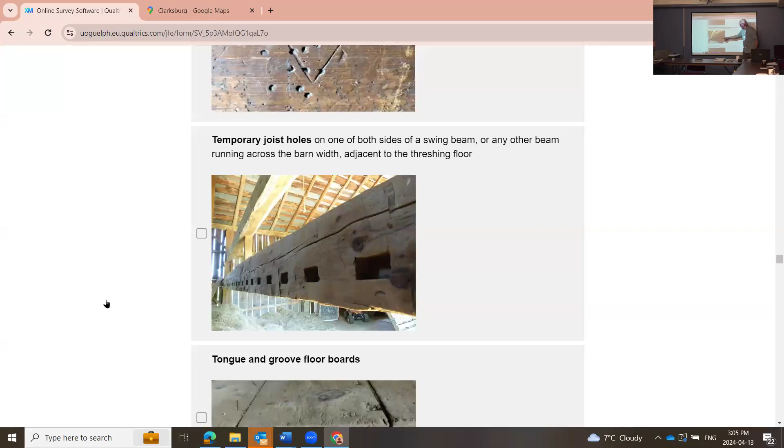Tongue and groove floorboards. So if you notice here, this little tongue and this little tongue, they're actually not part of the board. In the old days, their tongue and groove boards were grooved on both sides, and they put them together with the grooves together, and they punch a spline down between them. So it was actually a different piece of wood, not even connected to the floor.

And a good place to look for these is on the threshing floor - most likely is where you can see it.

Wagon rack lifters - we see them all over the place down in Niagara. I don't know if you see them up here as well. I think you do, maybe not to the same extent. They started coming in probably around 1880 or so.

I found a really interesting time that I spent with a fellow whose great grandfather used to build rack lifters, and he had a little lunchbox demonstration rack lifter that he would take around to the neighbors and say, I can build you one of these. And it was a working model. It's very interesting - I've never seen anything like it before. It should be in a museum because I think it's a one-off. I don't even think it exists. I've never seen one like this before in a museum.

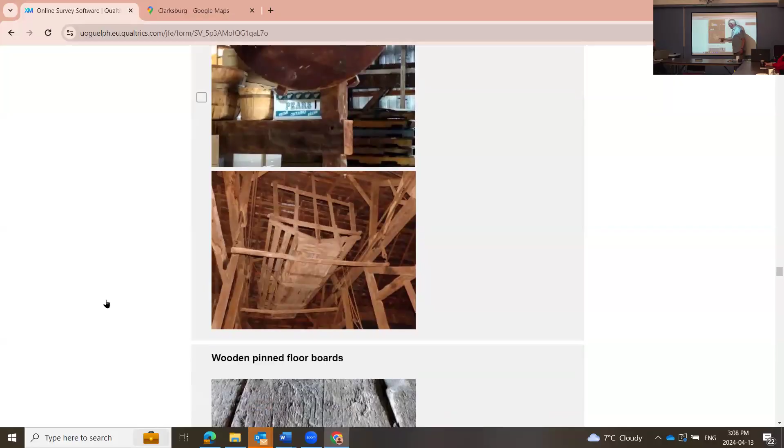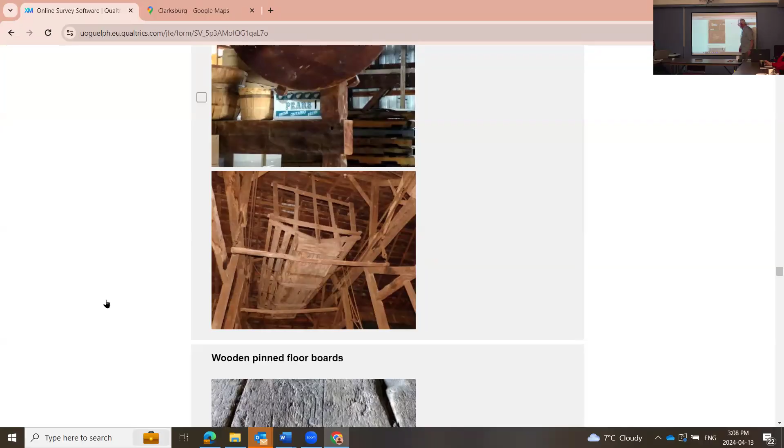And here's what it was. They would lift the rack right off of the gear, the wagon gear, off the wheels. They'd lift it right up, probably with wheat sheaves in it or loose hay, right up to the ceiling. I asked the owner if he ever remembered that thing being used. He said no, he's never seen it being used, and the guy's 80 years old. So it's been sitting up there for 75 years, this wagon rack. There's a lot of them out there, surprisingly.

Wooden pinned floorboards. We will see this in really old barns where there's no nails, that they'll actually put a wood pin into it on the threshing floor. I don't know if they're rare to find, but we do see them in the oldest barns.

Would steel nails have started to be used? Well, they had nails even in the 1830s and 40s, but that was mostly for putting boards on and things like that, not big connectors like this. Steve, help me here—when did... I've never seen that, you never see anything like that. This particular barn was built about 1850. I would say this would be unusual to find in a barn after Confederation. But I would assume that wood would be easier than metal. Yeah, I've got some square nails and they're tiny little things—that wouldn't hold anything. That's true, there weren't any big things like that, but wood would be more appropriate.

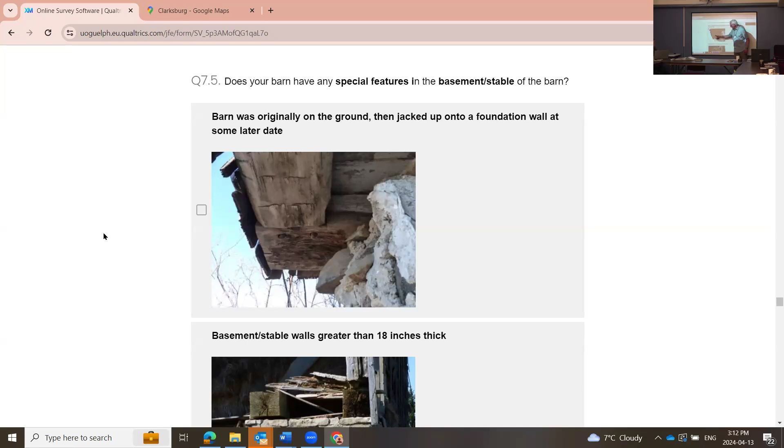Okay, good. Oh, here's the picture of when the barn was on the ground. So the beam is all rotted on the underside, but it's actually up in the air, and it didn't get rotten sitting up in the air—it was rotten from the stone that it used to sit on, on the ground. Might have been some water pooling there or something. So that was my clue that barn had been jacked up.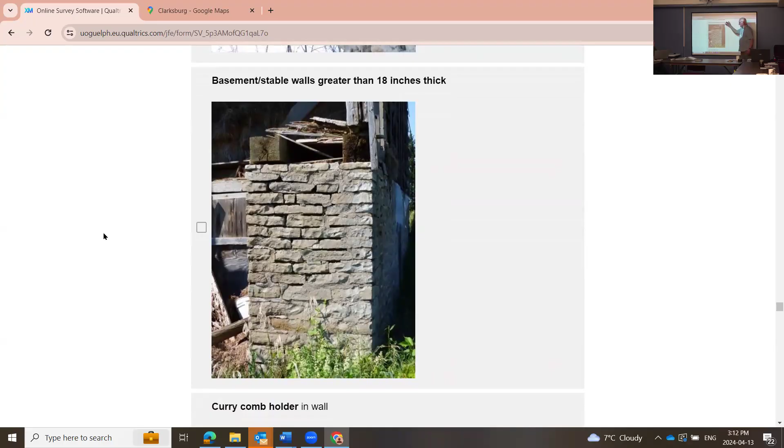Stable walls that are 18 inches thick or greater. The thicker the walls, kind of an age thing—the thicker, the older, not necessarily. But what did we decide, is yours 18 or 24? I think they're 24, I think you can see.

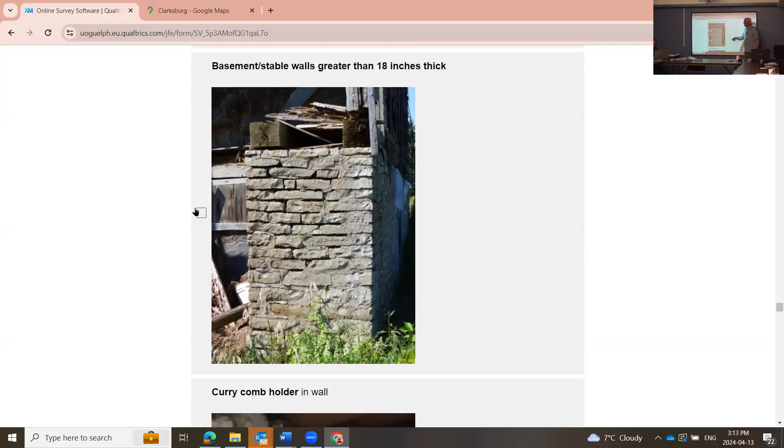Mark that off—curry comb holders, or some kind of opening in the wall where they would store some stuff, maybe some medicine or things like that. We believe there's one, do you have the picture of it? There's a neat picture at Emily's of a little cupboard in the side of the wall, just like a medicine cabinet, and it actually had medicine in it. And what did we decide?

Couldn't see from back here, but was there a door on that tiny hole or not? Yep. I remember that's the front door, they were just open. Here's the hinges. Do we have the picture of it open? I took one, but maybe we don't have it. That's right here.

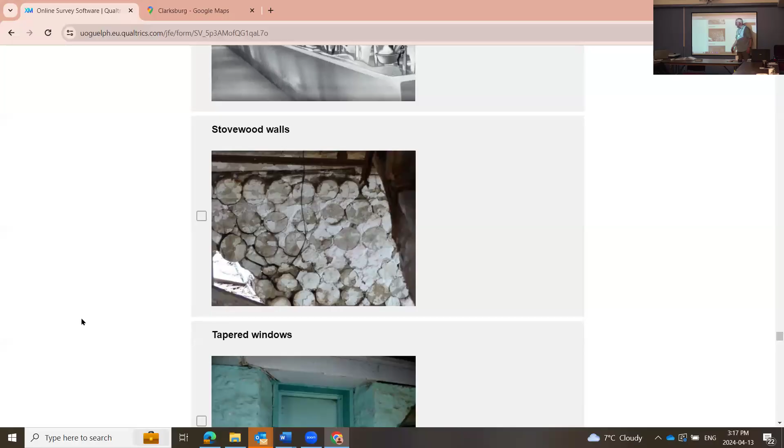Stanchions - lots of barns still have old stanchions in them. Stove wood walls, you'll see those, they were built sometime around the First World War or after. It was actually wood in mortar. I think it was a fad - you don't see too many of those.

Tapered windows, so they'd be tapered to let more light in - wider inside than outside. You actually have that in your barn, but not every old barn has tapered windows.

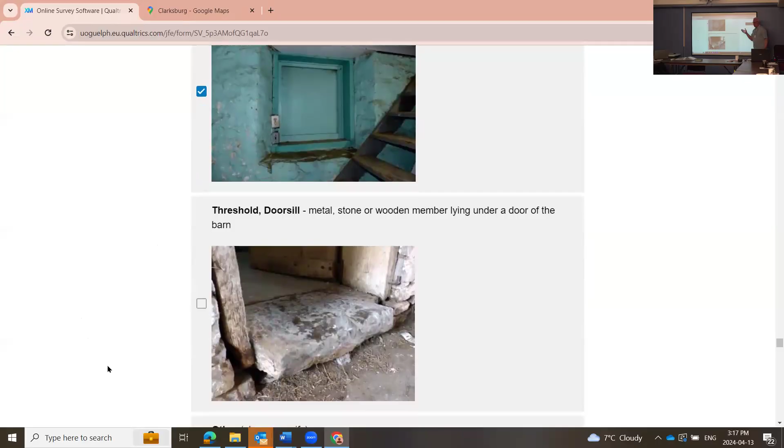Are windows common in general, especially in the foundation? Yes, I would say, although the number that you have is blocked. I think we decided there's 3 on each wall - got 3 on one wall, 2 in barns.

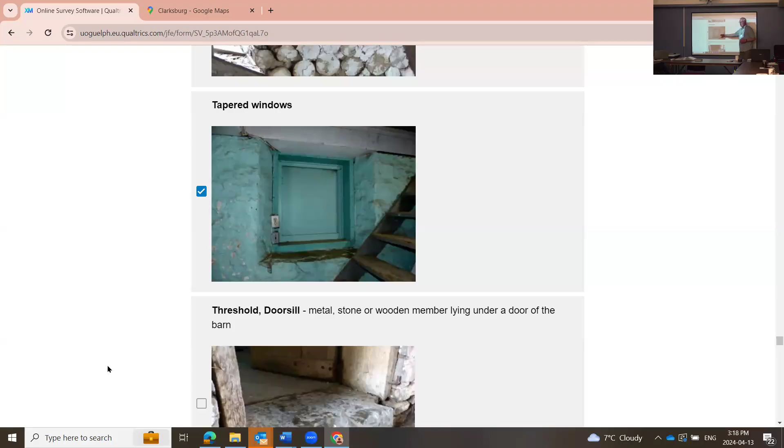Then windows and doors - but they'd be deep still. Oh yeah, they're very deep. That's where we used to store our DDT, the fly spray things - you remember those? The more dangerous things we used to suck in as kids, it's no wonder my hair's white.

Thresholds, sometimes with stone - that would be a very old barn. You see that in barns the odd time.

Is there anything else you'd want to put in there, like some message to the future? Can't even remember what your comment was, but is there a question on it? You could put it in there.

Bren pointed out there's lantern holders, just hooks in the barn every so often. I've used them for my solar lanterns during power outages, and it covers quite a bit of barn area. It's just a metal hook hanging down from the beam, and you hang your lantern there and it gives you quite a large area of light.

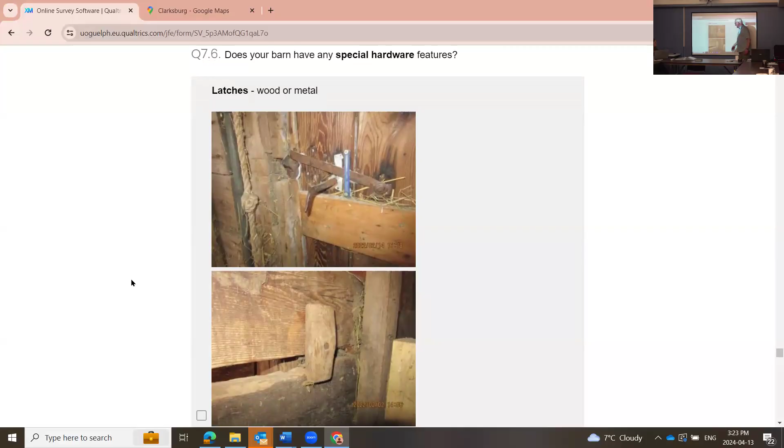And then all kinds of latches, if you've got some neat latches out there, we haven't got all the examples of them. There's so many latches out there, homemade ones, ingenious ones. You couldn't possibly show all the examples of all the different latches out there.

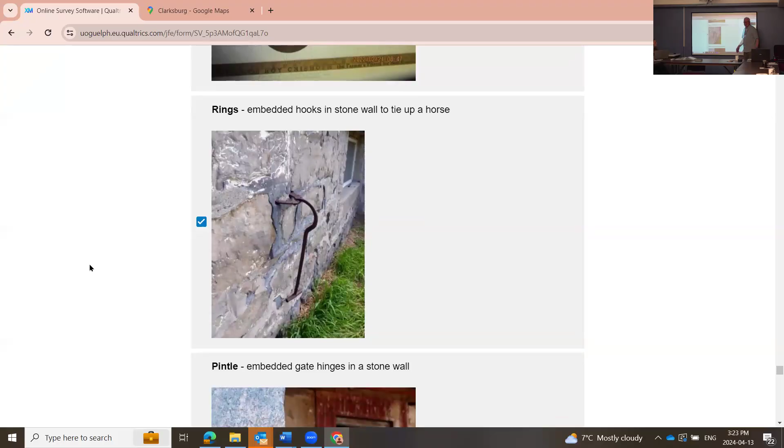You said we had the rollers on the granary, didn't you? On the door, the track, a little track. Some of them are very ingenious, very interestingly weighted, they would just drive perfectly. Rings on the wall could be for hitching a horse to, or maybe a gate, or something else. Different pintles you'll see out there, or for hanging a gate on. You'll see these all over the place, different kinds of pintles.

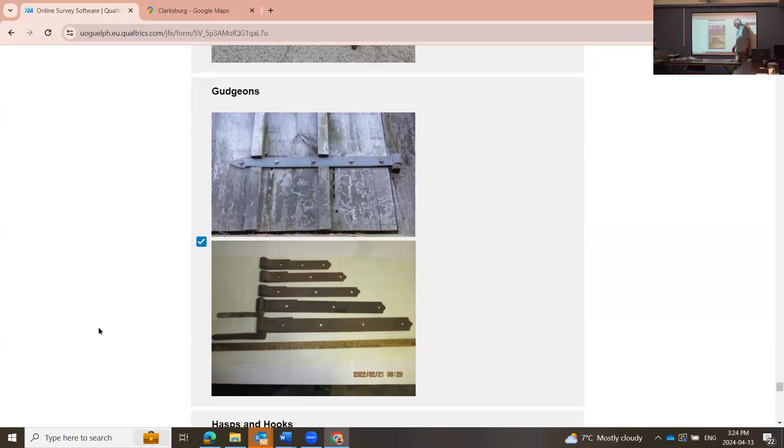Forged nails, if they're square, you can quite often tell the age of the barn based on that. Different kinds of gudgeons. I didn't take these photos, Will Samus took all these photos. I can't remember if you had any. Yeah, you had some, that's great. Hasps and hooks.

Different kinds of hinges, different kinds of handles.

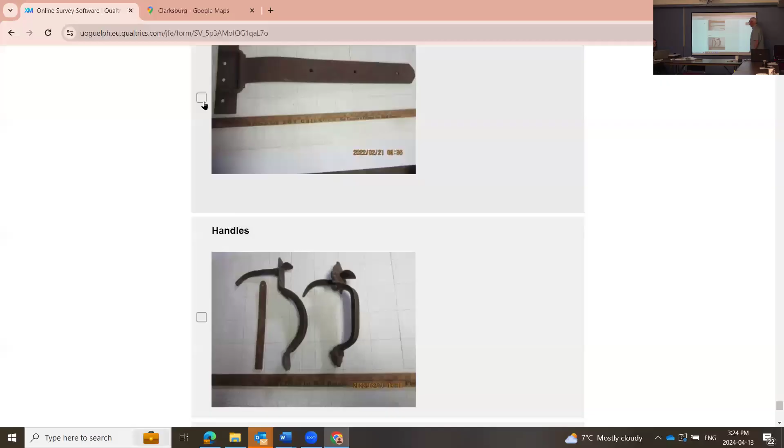Will, one of our directors, says this is a rope making device. I didn't know they had such a thing, otherwise I wouldn't have made 1,000 ropes when I was a kid out of baler twine, braiding, winding six strings. You make them 100 miles long.

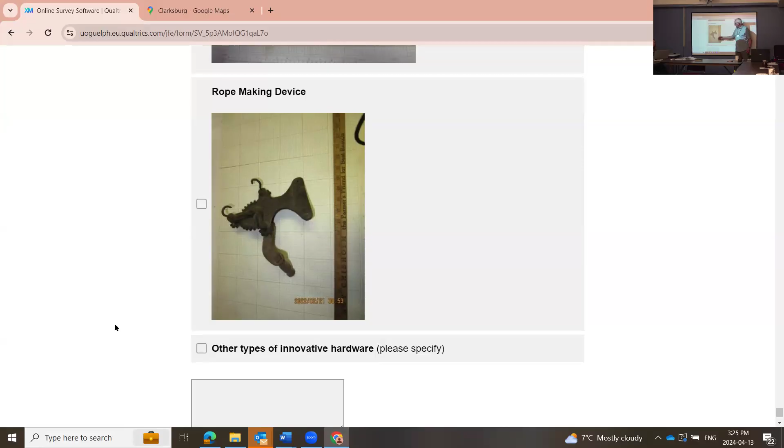You've never been to the Marshfield Heritage Festival? I have never been to Marshfield. You would have loved it. I know I'm gonna love it. They've even got one of those barns with the school, and rope making equipment. I've never seen a rope maker do that. They do it for the kids. Really? Yeah, and it just wouldn't be the same with baler twine, with plastic, the other twine. They get that size.

Other types of innovative hardware. So if you've got something, just tell us what it is. We're nearing the end here.

Any additions to the original barn? We've tried to give as many examples as possible. Quite often there's a milk house. Now there's a little building connected to yours, but apparently it wasn't a milk house. It could be an old milk house, could have a little cistern in there where the milk cans used to go in with cold water. An old silo, even if it was just a foundation, a lean-to, or another barn running the same way, so you've got another barn with a roof line running in an L. Feed room, workshop, wells - quite often there was a well right in that little cistern area.

Root cellars - we see root cellars. We have a root cellar in one of the barns that I wrote about. It's under the bridge, goes up into the barn. It's 14 feet wide, 8 feet high, and 28 feet long. It's almost as big as this room, and it's a Roman arch. It's just magnificent, and I think I was probably the first person in it in, I don't know, 50 years. Even the owner says, I never go in there, no reason to go in there.

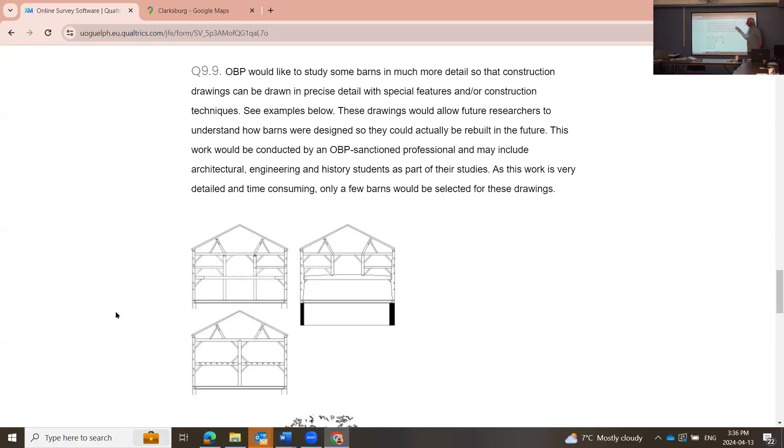But he's gone out and drawn everything and made up plans for it, because it's a special barn. If there are some special barns, it could be a round barn, an octagonal barn, or something with unique features. It's really historically significant, maybe a one-off. That could be something that a guy like this, or others, could actually draw up.

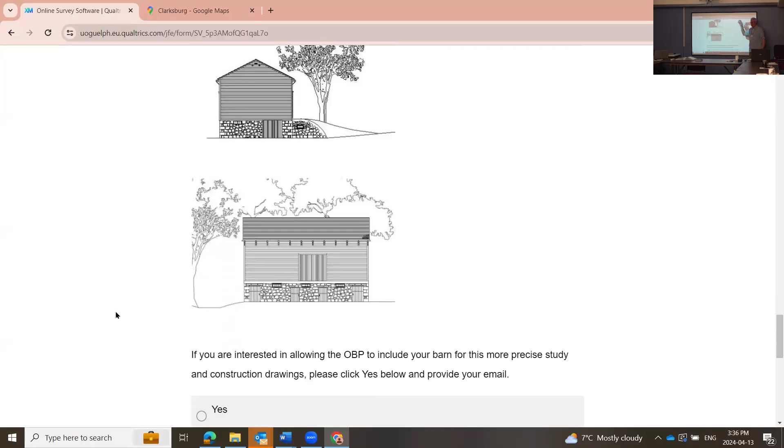So here's some examples of it. I've got a whole file, a big file. So if you're interested in including that, let us know. And if somebody else did this for you, you should put their name in there. So if Steve was doing somebody's barn, he would put his name and contact information in here, because he's the guy who actually did it, and he's the person we should contact.

And then tell us what you think. Was this hard to do? Was it easy to do? Was it crazy, like 'I wish I'd never opened it up,' or did you show it to your friends? Tell us what you think.

And when you're done, you hit submit survey. So up until now, you can go back, you can keep it open as long as you want. But when you hit that button right there, you're done. So if you feel you're done, you can hit submit survey. And I'll find out from Randy if it's there - it should be there now.

So you can't add to it later - like let's say Emily finds historical photos later on, okay? No, it's done, it's done now. Anything can be added, right, but she'd have to open it up again and say 'this is new information.' But for all intents and purposes, it's done. And if you submit this, your location of the barn and your name is all private. It doesn't go to anybody - nobody's getting it except for us.